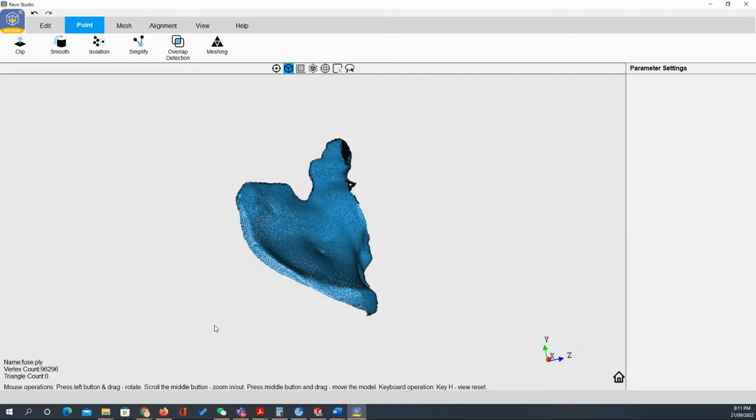Okay, now I'm going to import another part for it. So we go for the alignment, add a file, and we're going to look for the other part, which is meant to be the lower one. No, not this one.

I think I just need to check the size of the other one. Ah, it doesn't match. So that's the only one we have.

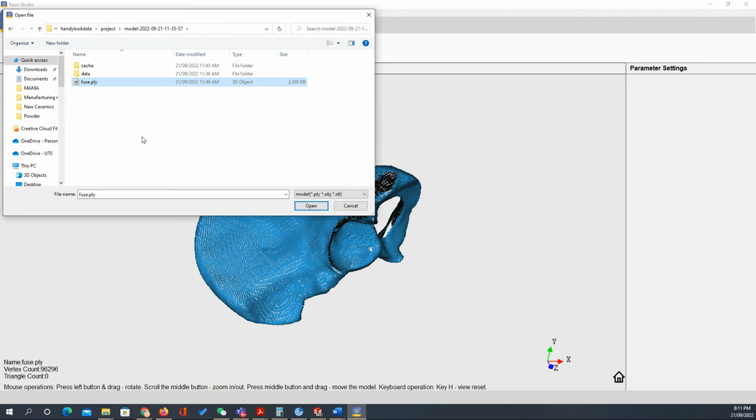Okay, so again, add and open this one as well. It's going to show me the other side. So obviously this will be the other side of the part I scanned. And again, just features, and it's going to be linked to each other - apply, do the work.

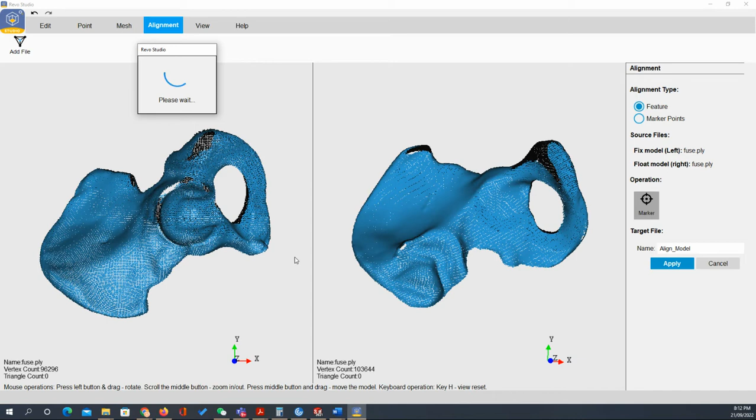Done. Now we have it as a 3D part. Now you can see that both sides have been joined. Now you say, okay, what are these black holes? Now we have black holes, so we need to remove that.

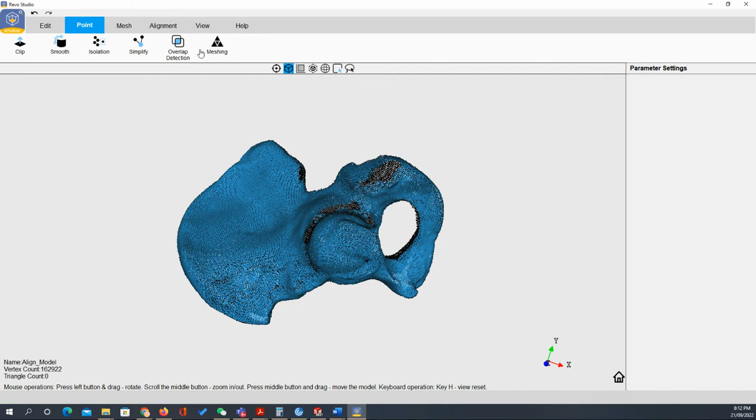So we go to mesh, and we can fill holes - still working. So we go to edit, no point, yeah, do meshing. Standard, yes, fill holes at the same time, yes.

Maybe I get to take it a little bit lower, to good. I don't need to do advanced. Play with that, will apply. Take its time, take a look here - it's going to disappear next.

Hopefully. Okay, and second time, because I increased that to good, you can leave it as the standard one.

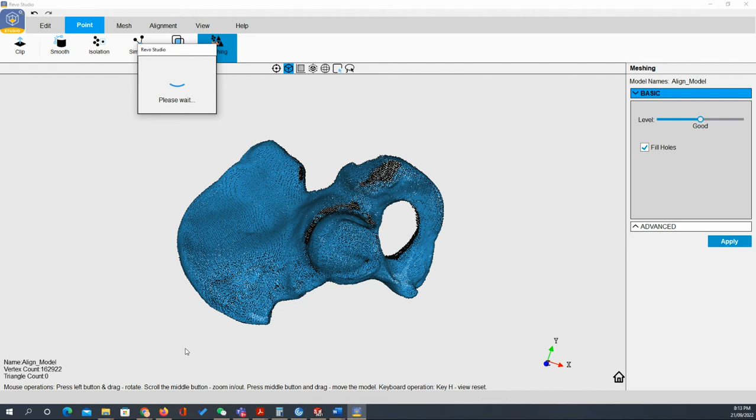Okay, now the part is solid. You can see that the part now became solid. Actually it's empty inside, but anyway, I closed all the holes, and now I have the part ready to be exported.

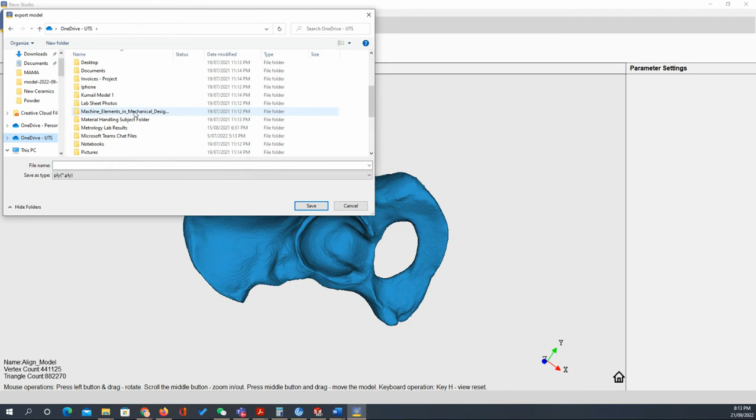Now the next step is just to export that - click here, and I'm going to do export, and save it in the the OneDrive UTS, and go to my folder called scanned, double click on that, and save it as - called Hip A.

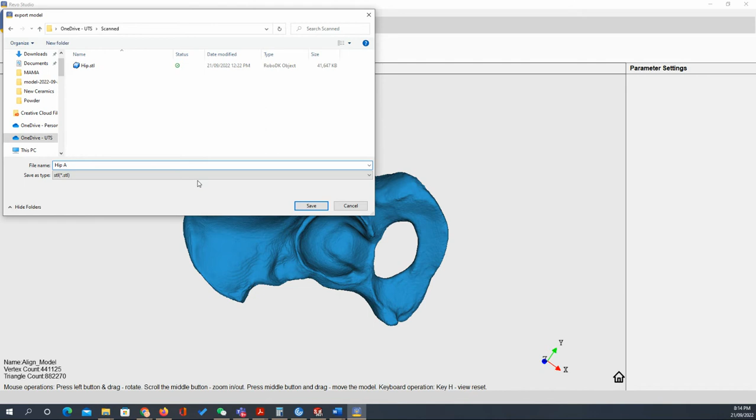So we do open - that's the file I'm looking at. We're looking at the HIP A, it's not available here. Go to all files, click here for the mesh file, this one.

And click on options, use the solid body - you can create the mesh bodies bounded by single faces. I'm going to clear this one now, and leave it just on the solid body, and I can click OK, open that file. It may take some time.

That's not Hip A. I think it's still uploading. Anyway, I will cancel this import again to wait for the other file to be uploaded. Let me check where this file is. So we'll go to my OneDrive, into the scanned folder.

Okay, so Hip A is available now. Okay, it's an STL file now. I'll try to do it once again. So open, and now HIP A is available now. So we'll go with the mesh STL, Hip A is now available option.

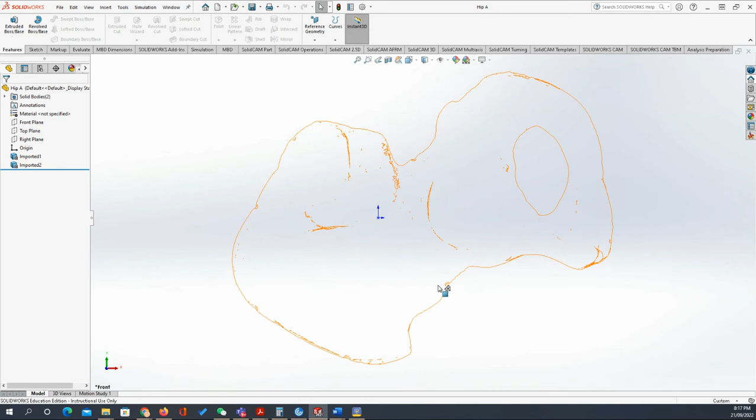Yeah, it's coming now, should be coming now. Okay, now that's the part. It's imported as two parts, I don't know why, but yeah. Okay, now that's what we got. This is my part, you can see that it's actually still mesh.

If I can get close to it, I will change it to a SolidWorks part. So now what I'm going to do is save it as a SolidWorks part, and save it here, and so it's going to become a SolidWorks part.

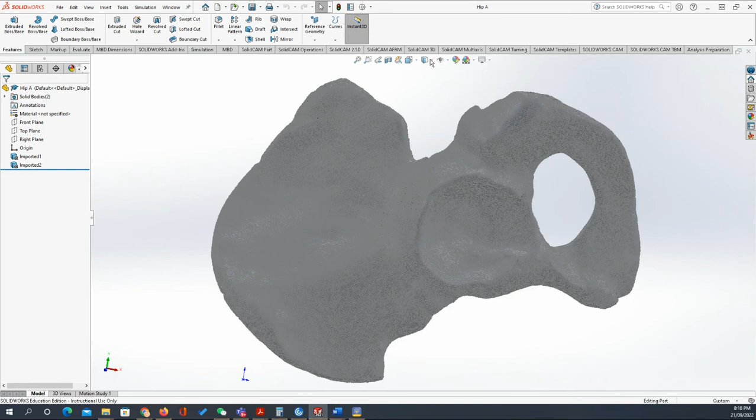Okay, now still the shape is, as you can see, mesh. If I would like to change the view, click here, click. Okay, now it's not meshed anymore. I know that's tricky because we just did that for the face, but not the internal thing. And if you look closer, that's what we're going to see for the shape. Remember that this part actually was containing too many curvatures, and that's what we got.

Now, after we got that, we need to make the engineering drawing out of it. So we click here to make the engineering drawing. Give this, yeah, say OK. Again to make the draw, say OK. And then again to simply choose the views I'm going to have in my engineering drawings, and I can start adding the dimensions to it.

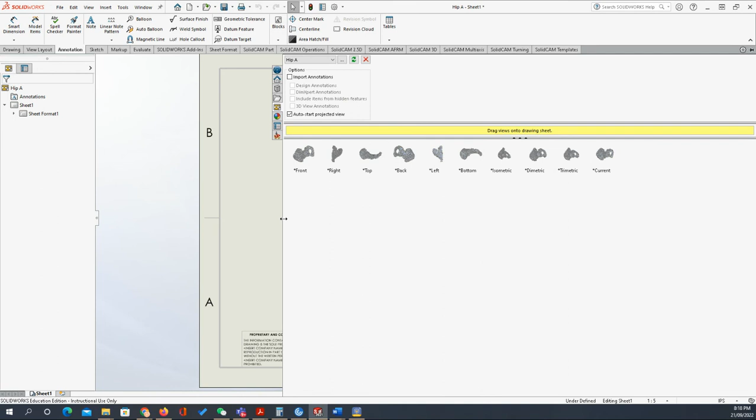So I will choose the front view, and floating. Yeah, I can see that we have the engineering drawing here. Again, to bring the other one, still floating. Okay, now this is a side view. Yeah, okay, and we're going to go for the other view.

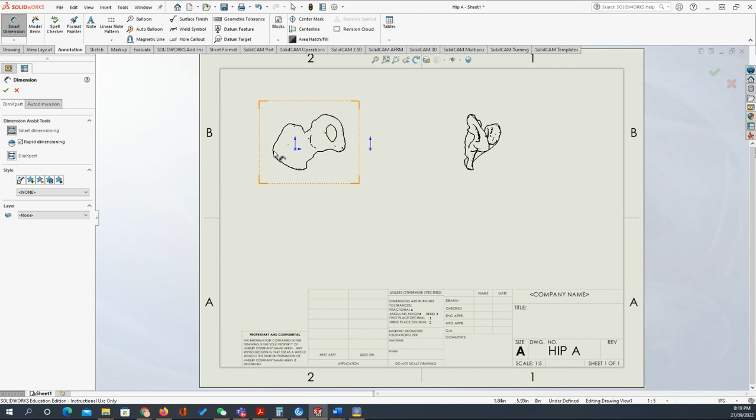Come on. Well, it's two sides. Okay, now we have the engineering drawing, so again we can add a dimension, for example by using the smart dimension. I hope it's going to work. I haven't tried that before with such a shape because actually we don't have points in this one. But in all the cases, let me try to click 2 points and try to find the distance. No, it's not working.

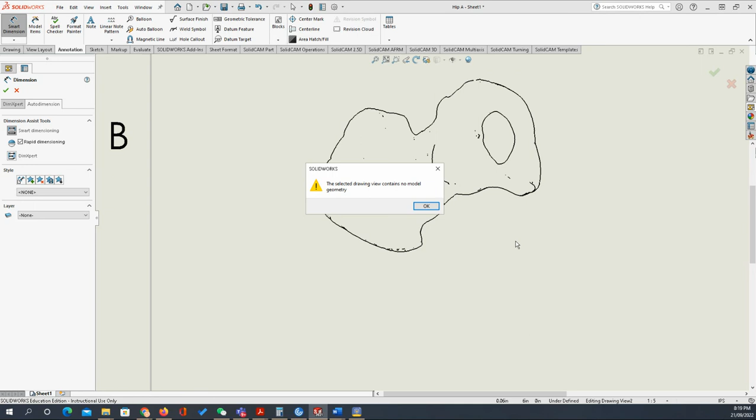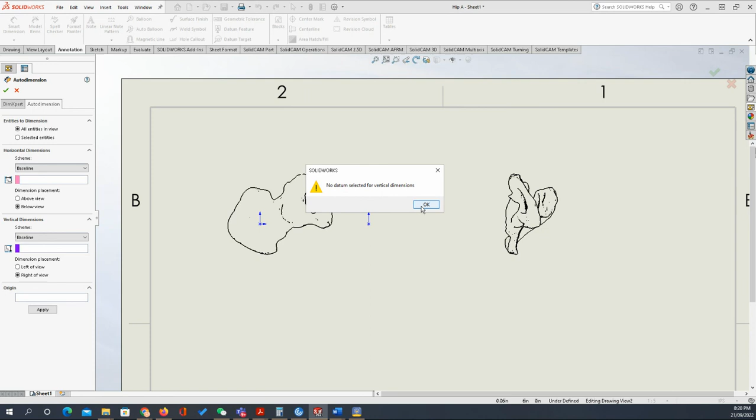Now I've selected horizontal dimension, also vertical dimension. Anyway, we got the engineering drawings down now, just something like that. So we'll continue trying until we get the final results. But actually, for myself, I'm really satisfied with the quality of the scan I had for the first time.

Still nice, still nice, yeah. Okay, well, this was my actual first scanning I did with this machine.